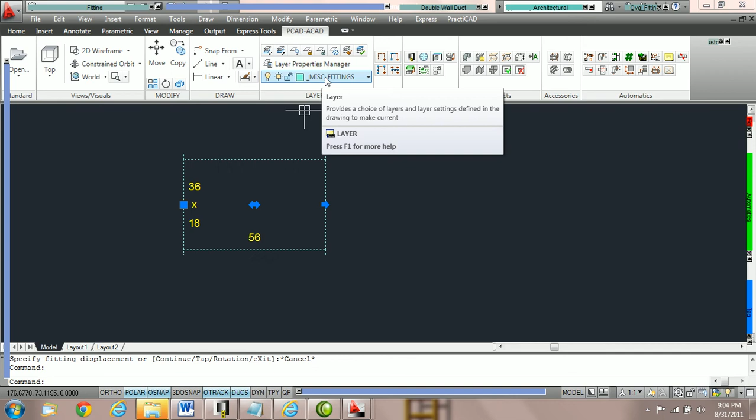But if I happen to have another layer that might be blue, I might not recognize that I've never given this fitting a zone. So what some users do is they go into their layer properties manager, and for the miscellaneous fitting layer, they sometimes take the line type, which should have been loaded - there are tutorials on how to load different line types - and they change it to zigzag. And then I'm going to press OK.

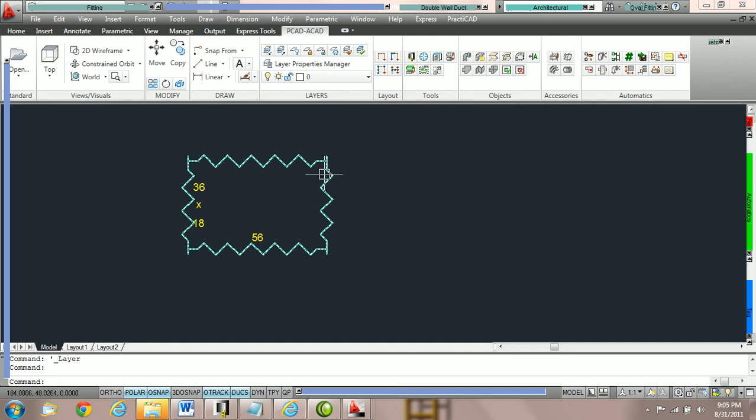What this will do for us is that anytime I'm drawing with a fitting and I forgot to put the zone or the specification, PractiCAD will put it on a zigzag layer, and I'll instantly realize that I've made a mistake. I should have selected a zone and then placed this fitting on the drawing. I'll recognize it right away.

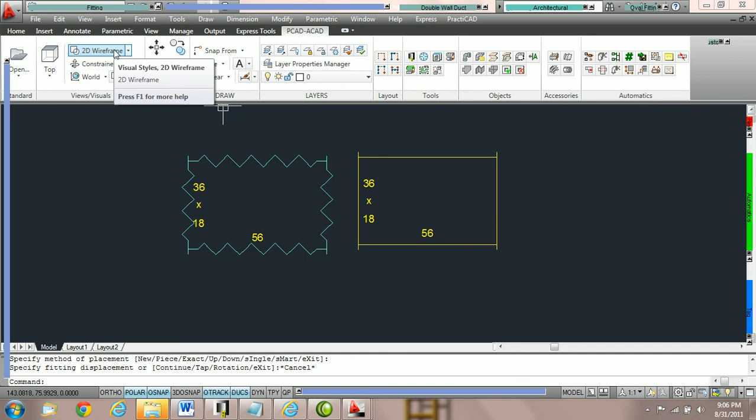The only thing to be wary of if you use this method is that you will only see line types when you are in 2D wireframe. If you are working in 3D wireframe, you will not see the line type. This is just the way AutoCAD visual styles happen to work. So it's a handy little tool, just showing it to you in a tutorial in case you'd like to use it yourself.

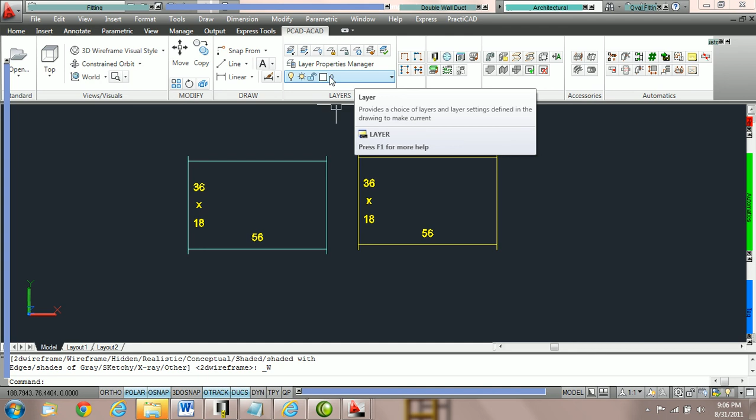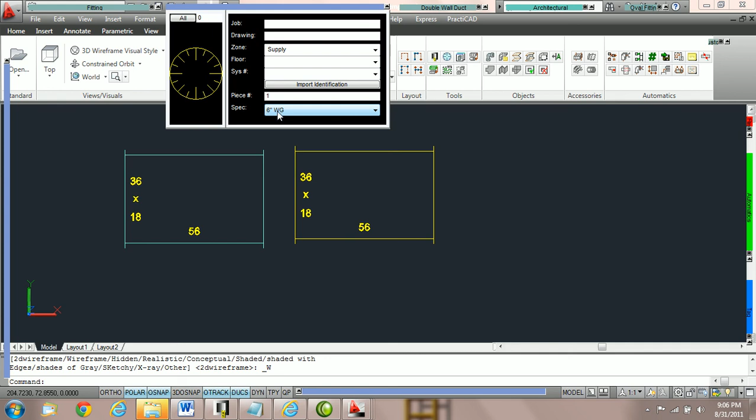Some users actually decide what they'd like to do is just make sure that the miscellaneous layer is a color that they don't normally use, like red. But it is good to know at the second you place something down to have some sort of indicator to make sure that you did in fact assign it a zone and a specification. Specifications are especially important because of downloading - you will want to make sure that it gets all the proper properties like gauge, reinforcement, etc.